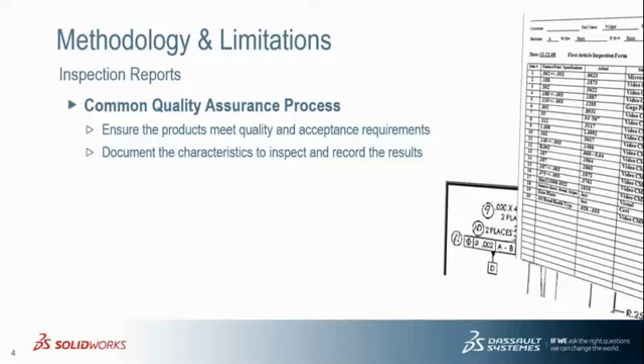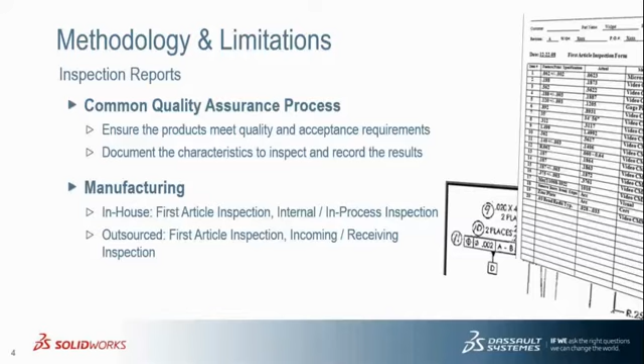Some of the current methodologies and limitations seen in taking new products to market are focused in two specific areas. The first is quality assurance, where many companies find there's a significant amount of time and effort involved in developing the necessary documents that lead organizations to deliver the expected level of quality for a product they design. Second, when the new product is ready for manufacturing, it's critical to make sure that the product is meeting the quality benchmarks established by governing bodies or internal processes. So how is it done today?

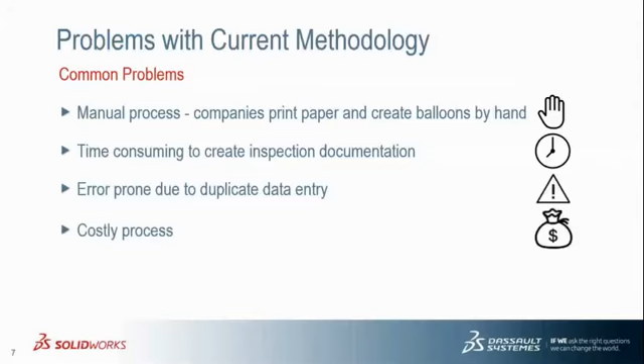Many organizations are diligent about taking the time to manually create balloon drawings, and even though this process works for many organizations, we found through our research and customer interviews that this process breaks down in four key areas. Not only is creating inspection drawings a manual process, but it consumes costly paper and employee resources. Additionally, the sheer process of creating inspection documents is significant. Also, the accidental duplication of information can easily lead to errors that ultimately lead to added costs.

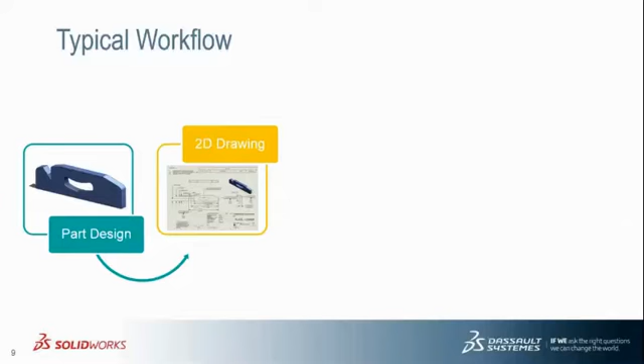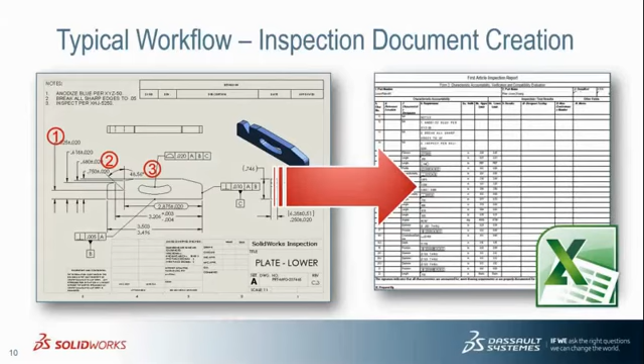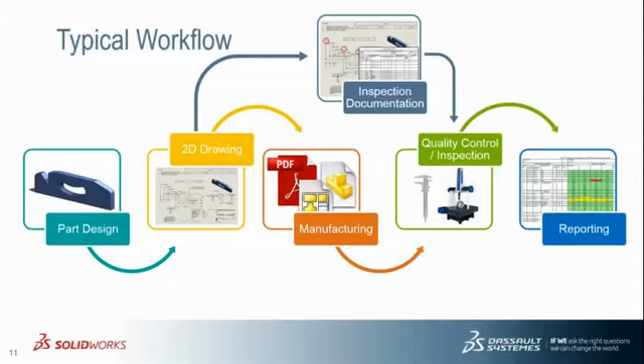Let's take a look at how this typical workflow for developing inspection reports begins. When the designer or mechanical engineer creates the part, it's then handed over, and the designer and possibly the mechanical engineer create the 2D drawing, which is then delivered for manufacturing by way of balloon drawings. Next, it's the quality engineer or inspector who uses these balloon drawings or inspection reports to do the inspection for manufactured parts, either through manual quality control or by using digital calipers or even more advanced CMM processes. Regardless of the process, the information is typically recorded on inspection sheets, which is then used for reporting, which ultimately comes down to a pass-fail determination.

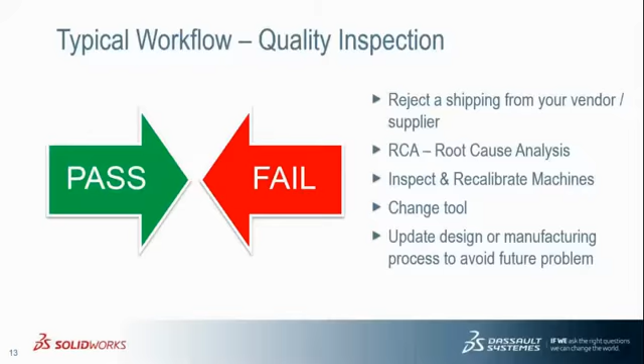It's at this point where organizations either pass the product on for selling or determine the root cause for the degraded quality. Regardless of whether the product passes or fails, there's a significant amount of resources placed in this area. So, if we can create inspection documents faster, we can improve product reliability, shorten our time to market, and ultimately deliver a higher quality product.

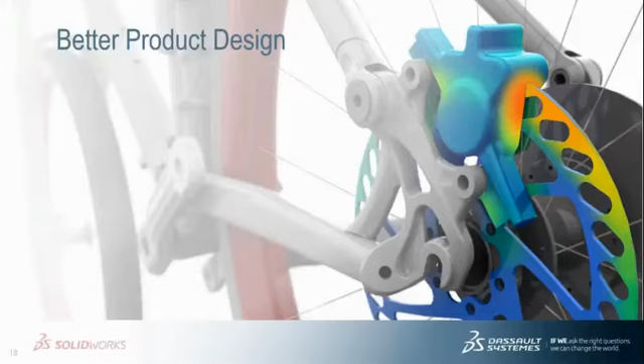Now, out of all that information, it's also important to identify what gaps SOLIDWORKS Inspection fills. Products such as Core SOLIDWORKS and even SOLIDWORKS Simulation are really focused on design quality, whereas SOLIDWORKS Inspection is targeted specifically at production quality. And there's a big difference.

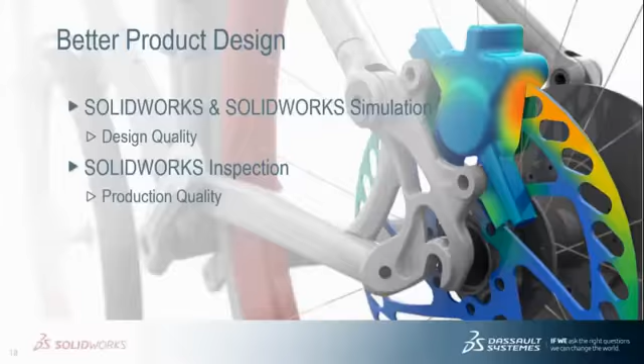Now let's discuss what SOLIDWORKS Inspection can do to make your process more effective. Just as SOLIDWORKS has shown success across many industry segments, SOLIDWORKS Inspection offers groups such as aerospace and defense, oil and gas, and even medical device manufacturing the necessary information to ultimately comply with industry regulations, including PPAP, AS9102, ISO 13485, and even FDA requirements.

As we look deeper into some of the key drivers in industries where SOLIDWORKS Inspection is successful, you'll see machine design, automotive, and even a consumer products focus.

And if you think about it, there's really a reason why Japanese car manufacturers have become more prominent in the U.S. Not only were they more reliable, but in many cases they also placed significant effort on their inspection efforts.

Additionally, take a look at reviews on websites such as Amazon and even companies like Best Buy, Apple, Home Depot, etc. You'll see that consumers are really quick to change their purchasing decisions based on the reviews on quality alone.

Now this holds true for B2B markets as well. If you're buying, say, a professional laptop, a conveyor, a commercial refrigerator, or any machine for that matter, B2B decisions are also based on quality.

So the question that comes to mind is, what is it that SOLIDWORKS Inspection can do, and how can it make my process more effective?

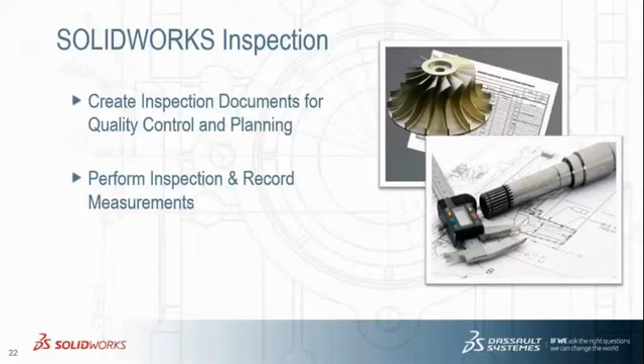SOLIDWORKS Inspection is an intuitive application that ultimately reduces the time needed to create inspection documents by upward of 90%, by automating much of the process and virtually eliminating many of the errors inherent in a manual process, thereby improving the quality of your inspection reports and ultimately helping to expedite your product delivery.

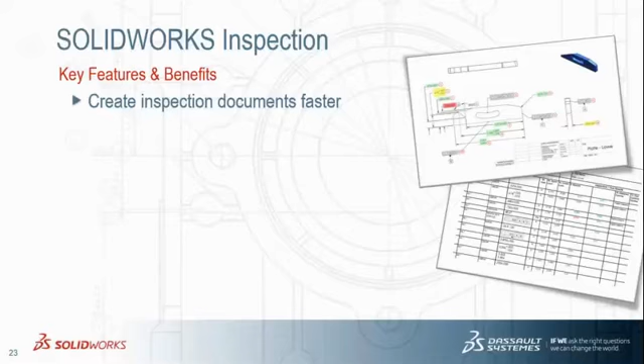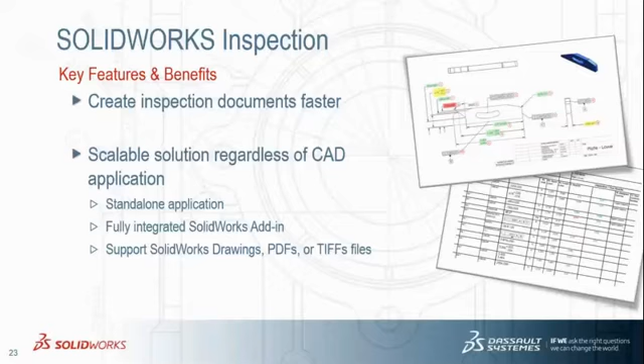SOLIDWORKS Inspection is also an easy-to-use, in-process software application that requires virtually no training. So whether you have SOLIDWORKS or not, you can use SOLIDWORKS Inspection to simplify the process of creating balloon drawings and inspection reports.

Additionally, by removing many of the erroneous errors and omissions in your inspection documents, SOLIDWORKS Inspection can really streamline your inspection process and ensure that your inspection documents comply with various industry standards such as AS9102, PPAP, ISO 13485, and more, allowing your organization to improve your time to market.

Now, if your organization performs inspections regularly and uses CMM or digital calipers, SOLIDWORKS Inspection can also provide additional support by easily importing that information directly and helping you perform your inspections more efficiently.

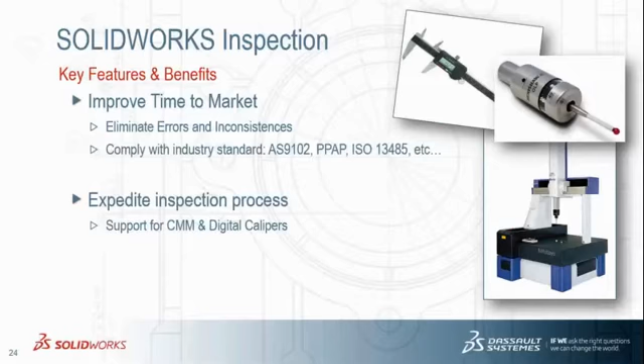So how does this break down? The SOLIDWORKS Inspection Standard offers both the SOLIDWORKS Inspection add-in and the standalone version. Both products have a comparable set of tools under a single license, allowing you to create inspection documents directly in SOLIDWORKS or with PDFs and TIFFs using the standalone version.

Now, under this framework, it also gives you the flexibility in your organization with employees who don't know how to use a CAD application to easily create inspection documents with easy optical character recognition functions. So to be clear, if you're responsible for ballooning drawings or creating inspection packages, SOLIDWORKS Inspection is for you.

Now, the SOLIDWORKS Inspection Professional version differs in that it gives organizations that utilize coordinate measuring machines, CMM, or digital calipers the ability to easily and virtually automatically verify critical inspection information with minimal input. So if you work, say, in a quality department and you need to verify parts and input measurements, SOLIDWORKS Inspection Professional is the right solution.

Now, it's also important to point out that both SOLIDWORKS Inspection Standard and Professional versions can automatically balloon designs and provide simple reporting in either PDF or Excel formats.

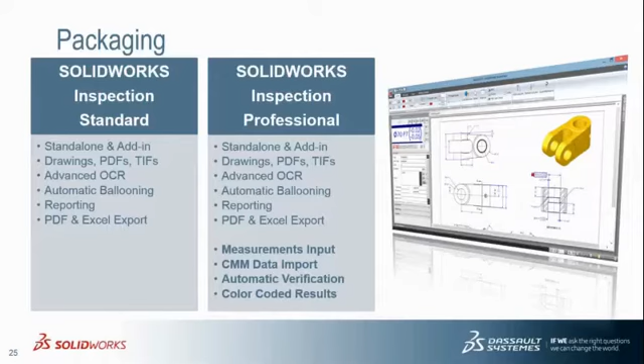So now that we've explored the core function feature set of SOLIDWORKS Inspection, let's do a quick demonstration, and then we'll circle back, leaving some room for questions that may come up.

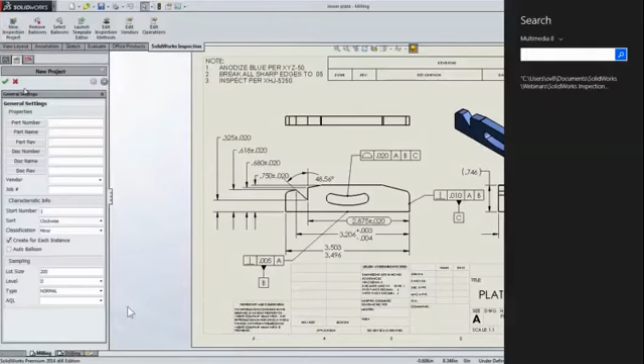SOLIDWORKS Inspection is a simple-to-use, easy-to-learn quality control solution that simplifies the process of creating inspection documents. With a few simple clicks, it can easily recognize and extract embedded attributes and critical information directly from SOLIDWORKS drawings. Once extraction settings are set, using basic or reference information, SOLIDWORKS Inspection automatically balloons your single or multi-page inspection drawings.

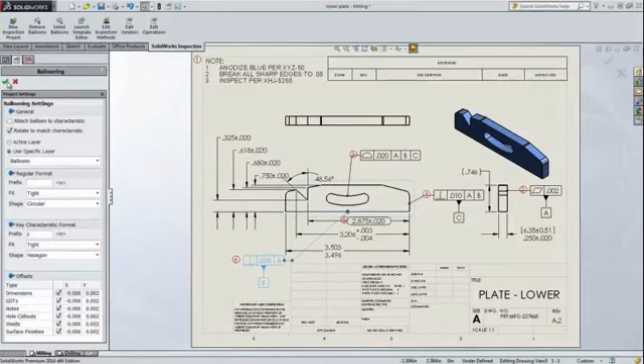Editing or even establishing key dimensions is a snap. You'll see here that balloon number 6 is marked by a key dimension. By simply updating the balloons, SOLIDWORKS Inspection automatically re-balloons the information, saving you valuable time and effort on single or multi-page drawings.

Additionally, SOLIDWORKS Inspection doesn't modify the drawing in any way. The balloons are added to an independent layer, giving you added flexibility to control visibility.

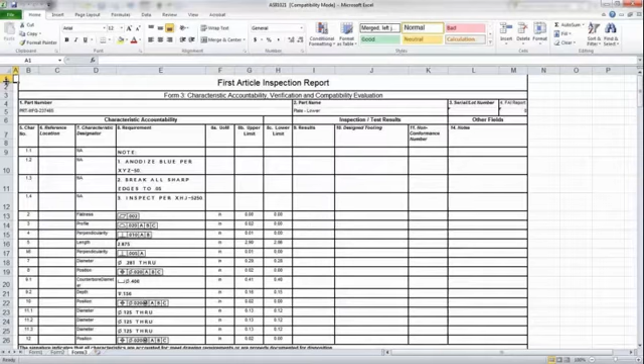Once it's all set, SOLIDWORKS Inspection can quickly export this information out to an FAI report or customized reports to suit your needs. For customers who need added flexibility working with PDFs, TIFFs, or scanned documents from other CAD applications, the SOLIDWORKS Inspection standalone application is included.

The advanced optical character recognition capability seamlessly extracts critical information from embedded attributes. Simply select the object, and SOLIDWORKS Inspection intelligently comprehends part names, numbers, revisions, and more right from the printed dimension.

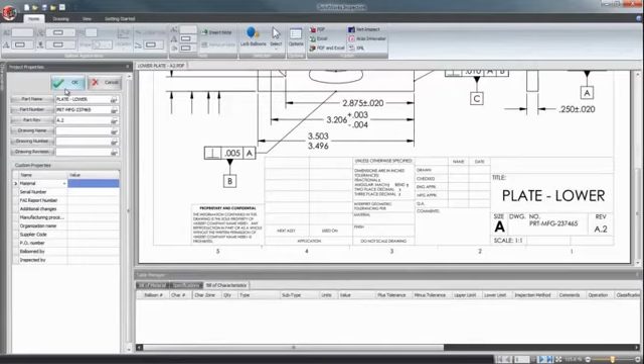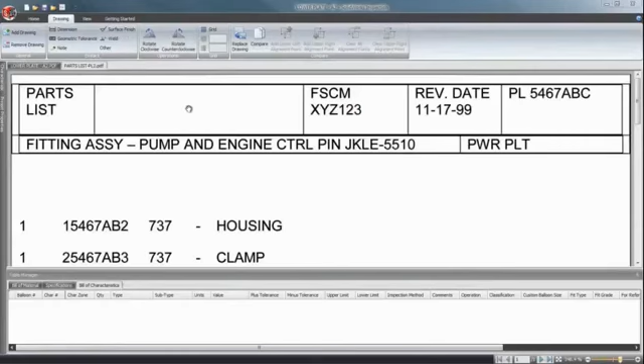Additionally, whether it's a part attribute or bill of material information, SOLIDWORKS Inspection can intelligently extract the formatted content right from PDFs and TIFFs while maintaining the design format, which is then assigned the most relevant part information, such as part names, numbers, FAI numbers, among others.

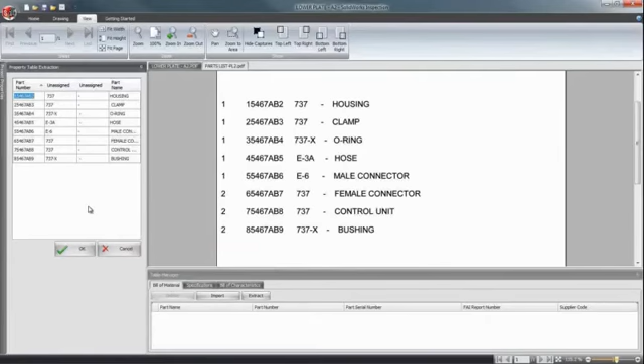As the process of creating inspection drawings becomes more complex, SOLIDWORKS Inspection streamlines the creation of ballooning drawings by automatically recognizing the printed content from the PDF.

But the most important piece is that not only is the textual information taken from the drawing, but the content is tabulated in a bill of characteristics shown below. So by synchronizing the part dimension and the appropriate balloon in an easy-to-understand format, this simplifies the process of how we create this content.

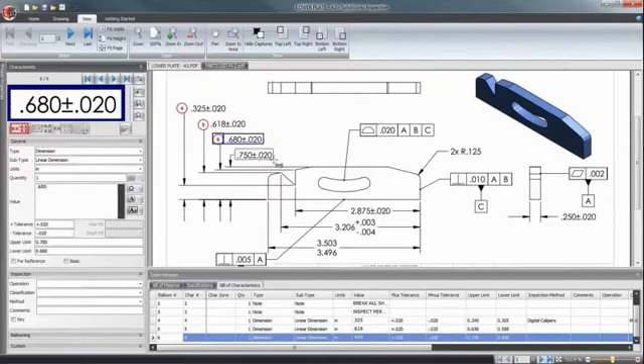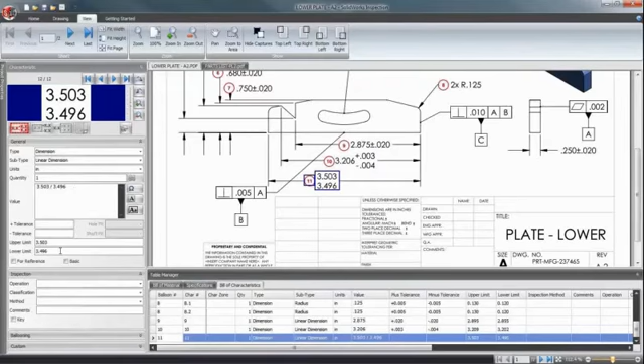As part of the creation process, SOLIDWORKS Inspection also provides added flexibility when adding various dimensions on your drawing. Here you can see that SOLIDWORKS Inspection has added the information below, and balloon number 11 is actually a double dimension. SOLIDWORKS Inspection added the information in the bill of characteristics table while seamlessly minimizing the amount of input required for the user.

As part of the creation process, SOLIDWORKS Inspection also provides flexibility in adding critical inspection information ranging from GD&T, tolerance information, inspection classifications, and also identifying key dimensions.

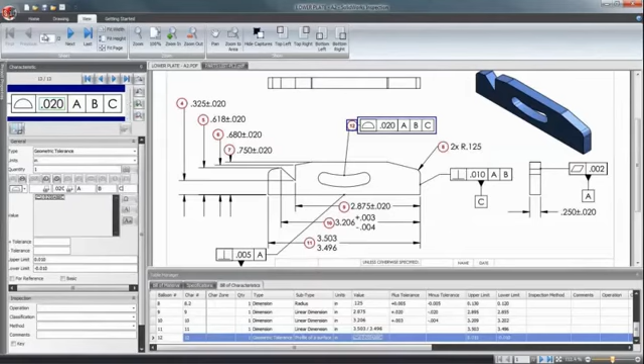With minimal input, SOLIDWORKS Inspection also allows us to modify how our information is set up, including the font, color, and other format settings, giving your organization complete control over how you display your inspection drawings.

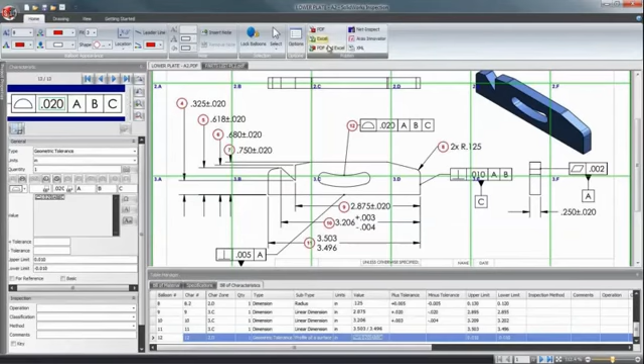As parts become more complex, SOLIDWORKS Inspection also offers a grid format that adds even more efficiency through character zones, allowing users and inspectors to find information when drawings that contain a significant amount of balloons are difficult to understand.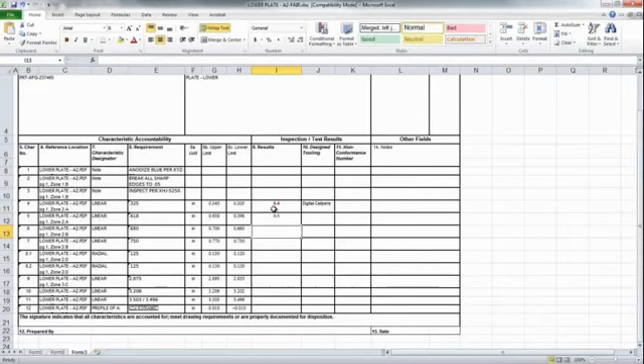Exporting information out of SOLIDWORKS Inspection can be easily accomplished through simple PDF, Excel, or even XML formats, among others. Here we sent it out to an FAI report in an AS9102 format, and it provided the necessary information that was required for inspection departments.

I think we'll all agree that entering inspection results is time-consuming. SOLIDWORKS Inspection simplifies the entry of test results and color codes that information for immediate comparison.

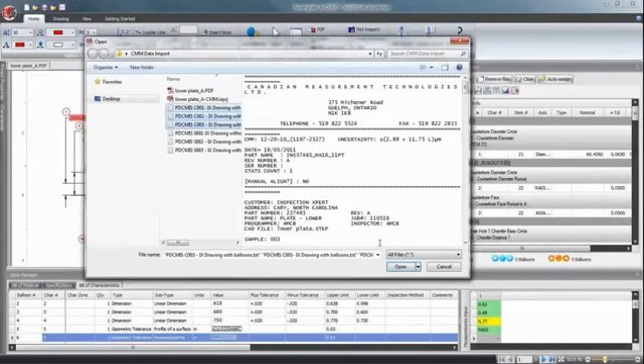For customers who are using digital calipers or need to import CMM results, SOLIDWORKS Inspection Professional automates the import of measurement data directly into inspection reports, thereby streamlining your processes and increasing the control of how you create these high-quality parts.